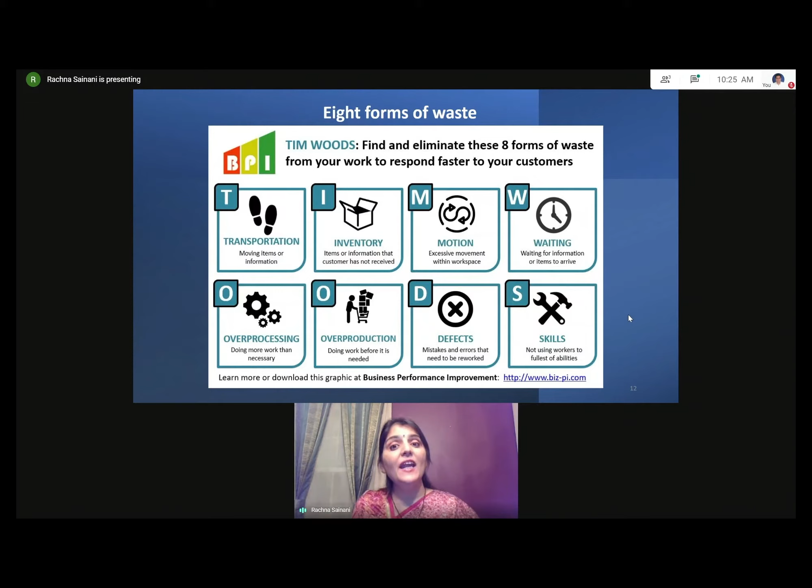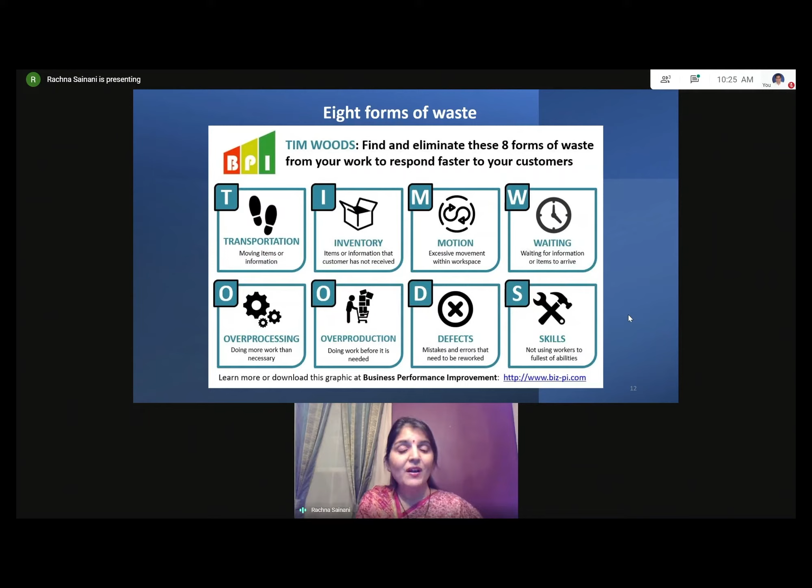And last but not least, not using the workers to their fullest abilities is also considered a form of waste, so skills is the last form of waste. These are the 8 forms of waste which we try to eliminate whenever we try to make a process lean. Lean is a general concept, but it improves efficiency by eliminating waste.

Now we are going to discuss lean in PAT. But before that, I can't help but remember our college routine. It's been almost 20 years since I left Anandpur campus, but I can still say with pride that every single activity we had in college was a value added activity — starting from the morning prayers and exercise to the self reliance sports, every single thing we did during the day added value. That's a great example for lean philosophy.

Now I come to the actual topic of process analytical technology. The way I'd like to approach this is to first share with you what traditionally happens — so consider any pharma company, and I'm saying pharma because that's the most common form of chemical.

There are many chemical manufacturing processes, but the most common form is pharma, which everybody is aware of because it goes into pharmaceuticals.

So the way it happens is there are certain operations mentioned on the slide. As you get the raw material and go through different steps of synthesis, extraction, and distillation, at every step the product needs to be checked for quality. The way it is checked is we sample it and send it to the QC lab, the quality control lab, which tests it. If the test passes and it meets the specification, the product is used for the next step, or if it's the final product, it is packaged and shipped out.

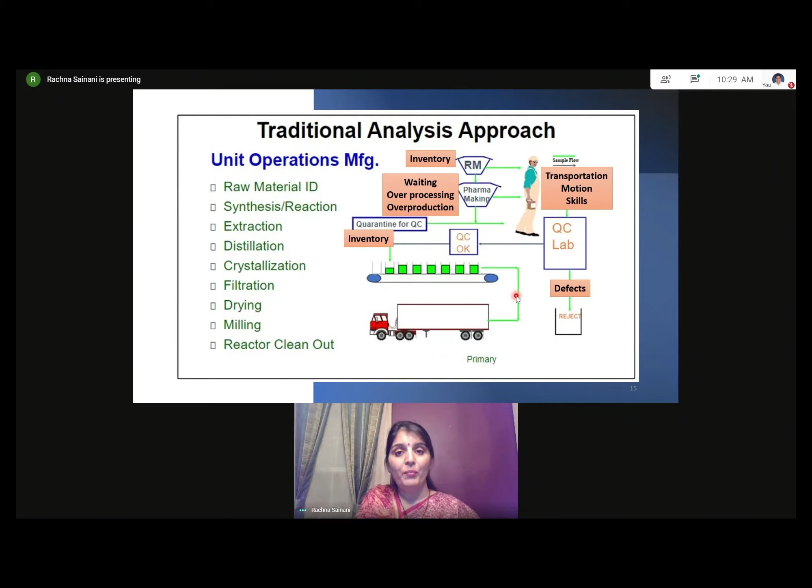So what does PAT do? PAT, which is process analytical technology, suggests that we test the material right there. As we go through all these different steps, we have the analytical instrument attached right there, and we get real time data. That way we are able to take care of all of those 8 forms of waste. That's how PAT is considered a very lean approach to pharma manufacturing.

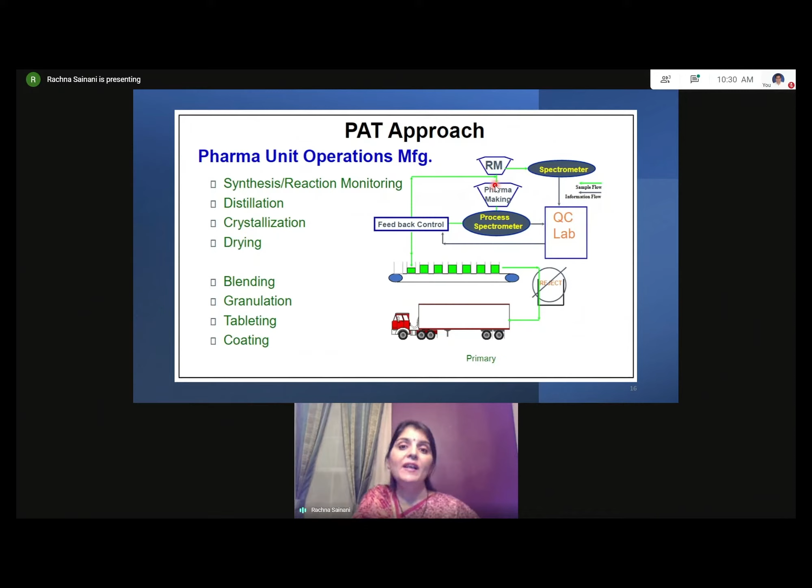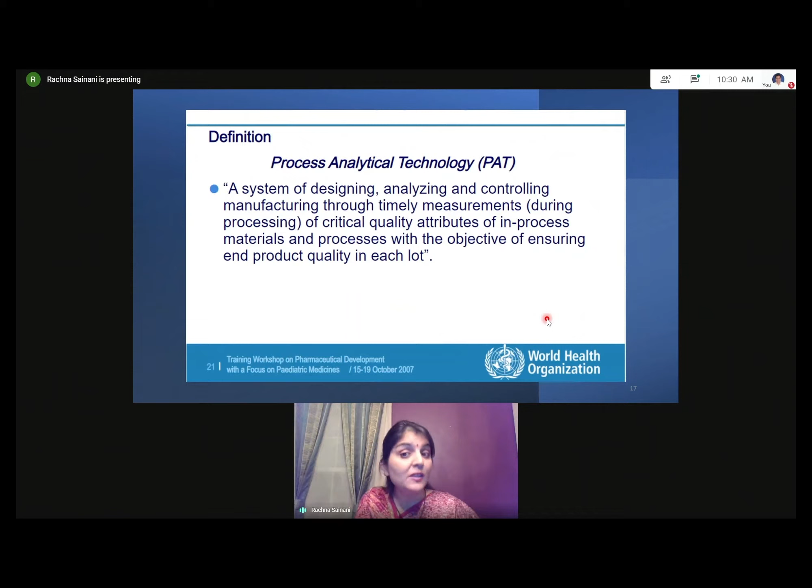This is a fancy definition of PAT, and I'm not going to read it. But one point I want to bring across is that other than removing the 8 forms of waste, as you do process analytical technology, you are building quality into the process because you're watching your process the whole time. So you are building quality in each lot through timely measurements instead of measuring it after the fact. That is the beauty of PAT, or process analytical technology.

To explain further, the conventional product-oriented analysis happens at a snapshot. If you think about a process, a compound which uses three steps to make it - after every step you would sample it and test it. So you're basically taking snapshots of the process and seeing what the material looks like. While in PAT, it's recommended that you test it the whole time as the process is happening, as shown by these arrows. So you're testing it the whole time.

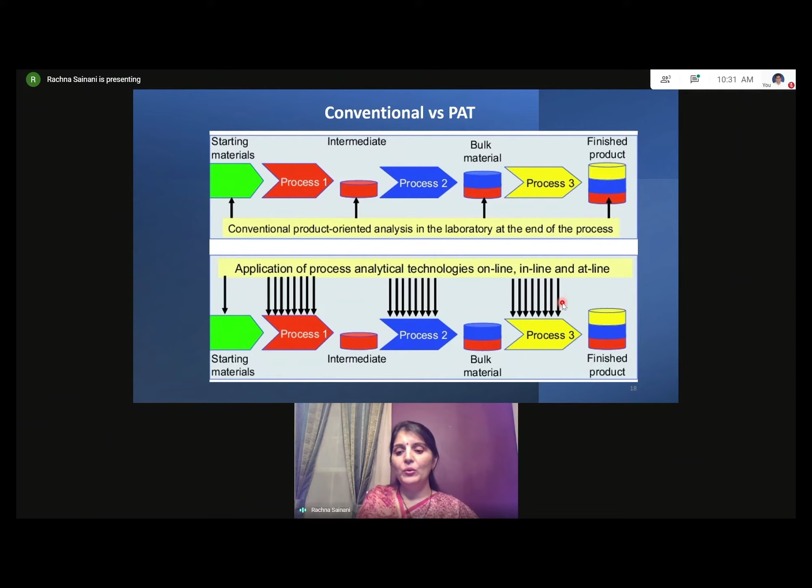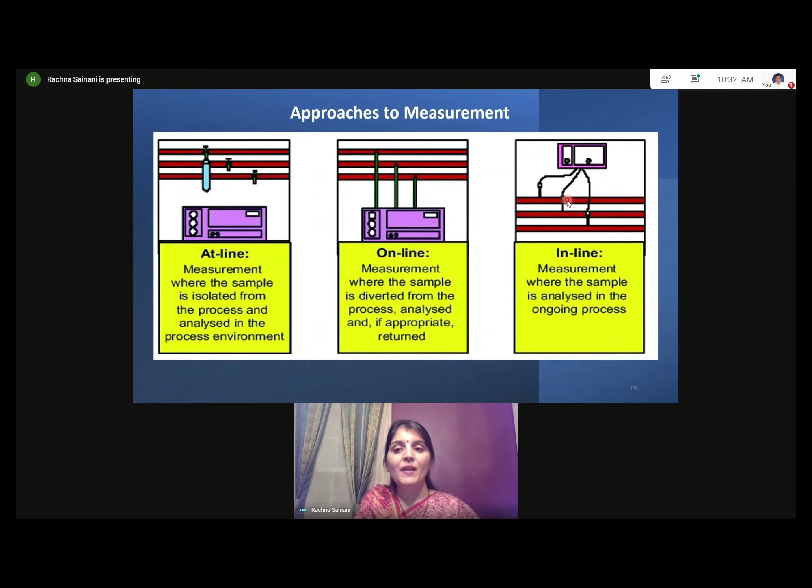And how do we test it? There are three different approaches to the measurement. We can do it at-line, which means you isolate the sample from the process and then analyze it in the process environment. The other option is to do it online, where you divert the sample from the process, analyze it, and return it back to the line if appropriate. Or the third way, which is the most efficient, is inline analysis, where you are analyzing the sample in the ongoing process - this could be more like a probe or a sensor in your reaction vessel or reaction line, where you're constantly testing the sample. So there are these three different approaches by which the analytical measurement is made.

So the one thing where PAT really stands out is that in traditional analysis, the process is actually a black box, because we take samples at certain points and test them. So we know that, okay, after the first step, this is what the product looked like.

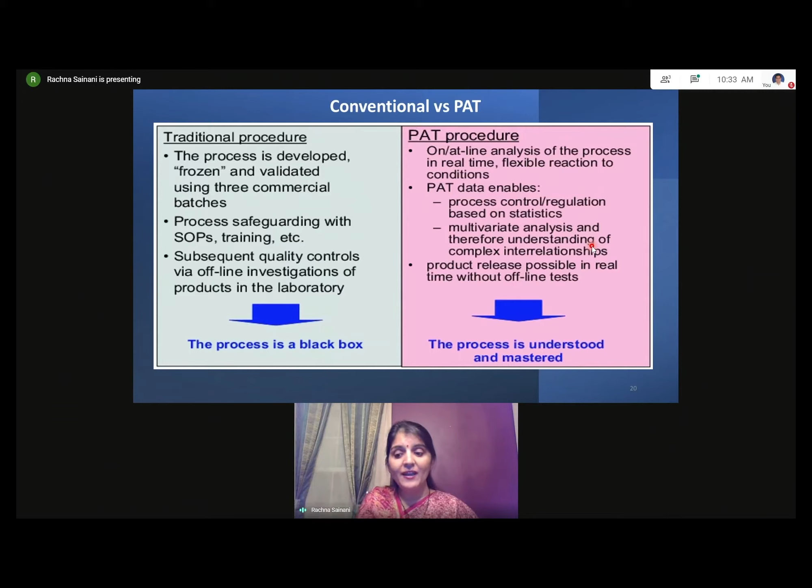But what was happening during that step is not known, right? So that's why the process is a black box for us. Whereas if you use PAT, the process is understood and mastered, because you have the complete data of what the process looked like at every single step. And that's why PAT is highly encouraged as a regulatory approach.

So now, what comes to your mind if you are trying to do inline analysis versus offline analysis, what's the most critical thing? The one most critical thing is the choice of sampling points, right?

Where do you sample? Here I have some examples. Whenever any chemical compounds are made, these are some of the common equipment which get used when making the process. So you have a reactor in which you do the reaction. Then you might have a place where you blend the chemicals, like a powder blender. You have a place where you dry the chemicals, and then if you're formulating it into tablets, there is another equipment we use. So these are some of the basic equipment. There are many more fancy equipments out there, but these are some of the basic ones.

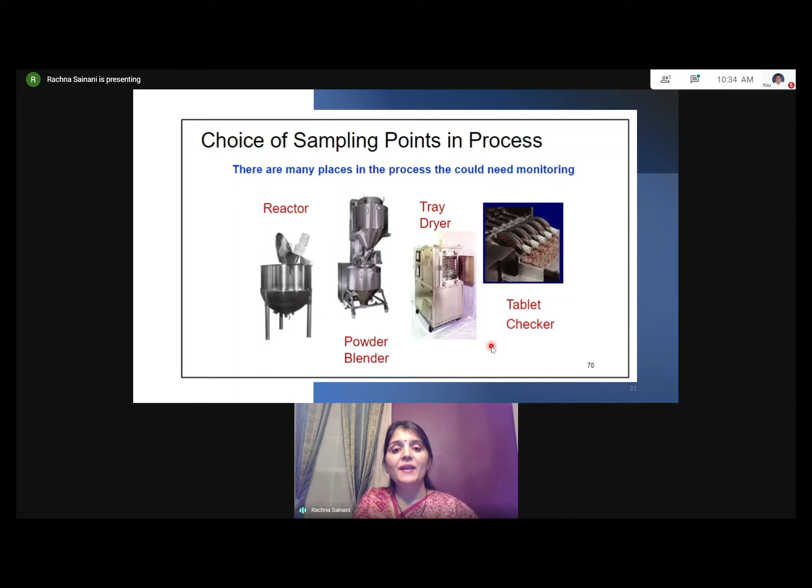One thing to remember is that it's very critical to choose a proper sampling interface. Here, in a nutshell, I have given some examples of sampling interfaces which can be used. The most preferred one is an insertion probe, which you can either put directly in the reactor sampling system, or sometimes it's even inserted in the drain valve. So that's the inline analysis, where you're directly inserting the probe in the reactor vessel.

The other option is a fast loop. So you have a loop coming out of your equipment, and that's where you insert your analytical tool. This is a good way to do it, but sometimes you have reactions running at high pressure or high temperature, and then it's not physically possible to have an analytical probe in the fast loop, in which case we divert the sample to a slower loop. This loop will be at more like room temperature, normal pressure, and then you're able to insert your probe or analytical tool right here for the analysis.

One critical thing to remember is that failure of the sampling interface is responsible for most of the problems in process analytical applications. So if you ever take a route where you're trying to use PAT for any of your research, or developing any process, make sure you spend enough time looking at the sampling interface and trying to use a proper one, and then you will have successful data collection.

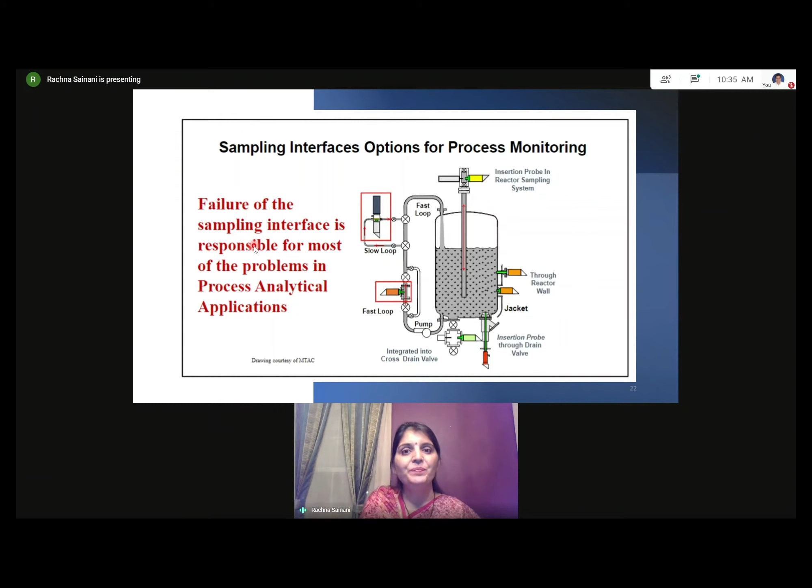So on this slide, I'm trying to talk about some common PAT tools. As students, I'm sure you are learning all different analytical techniques. As you go forward, you'll learn many more. I'm not going to discuss any of these techniques in detail, but I did want to drive the point home that as you have different steps in the process, the needs of analysis might change.

For example, when you're doing a reaction, your focus might be on completion of the reaction, what the impurities look like, what the kinetics of the reaction is, and what the solvent composition is. All of those analyses have some typical techniques mentioned here which are very useful to understand the reaction completion and impurity profile.

Now, as you're working up a reaction, the yield becomes more important. The impurity still stays important. In that case, you could use techniques like chromatography, MIR, NIR.

Now, once you have worked up your reaction and you're trying to crystallize it, you're trying to isolate your solid in form of crystals. At that point, the particle distribution, shape or form, or supersaturation become more important. You try to watch those. And at that point, turbidity, FBRM, PVM, Raman, MIR are the common techniques.

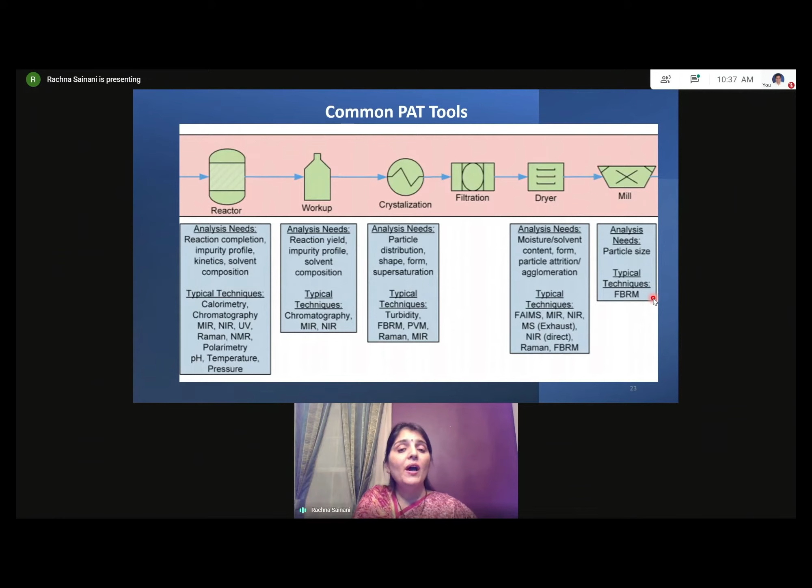Here I have mentioned some of the more often used techniques in PAT. There are techniques like mid infrared, which are very versatile and very easy to interpret. So it seems to be the most popular technique used in PAT.

We have Raman, which is limited in sensitivity, but still seems to be a popular tool, especially because it can work with solids and slurries.

We have NIR, which is easy to deploy, but it does need some expertise. So it's a little bit more tricky to interpret. You need some experience with the technique to use it successfully.

And then UV. As we all know, small molecules, especially drug molecules, typically have a chromophore, so in that case UV can be a great tool. You can use UV analysis, inline analysis, and understand your process better.

So when I talk about all these techniques, some of you might be thinking, oh, so that's all PAT is about—instead of using analytical equipment in a separate lab, I'm using it right there. Is that what it's all about? Not really. There is more to it.

One thing we are not considering here is that when you analyze a sample in the lab, you are actually cleaning up the sample. You're preparing it, cleaning it up, and then analyzing it, and you have a lot of knowledge about the sample. Whereas when you do PAT, there are so many variables in place, plus you're not cleaning the sample—you're analyzing it as it is.

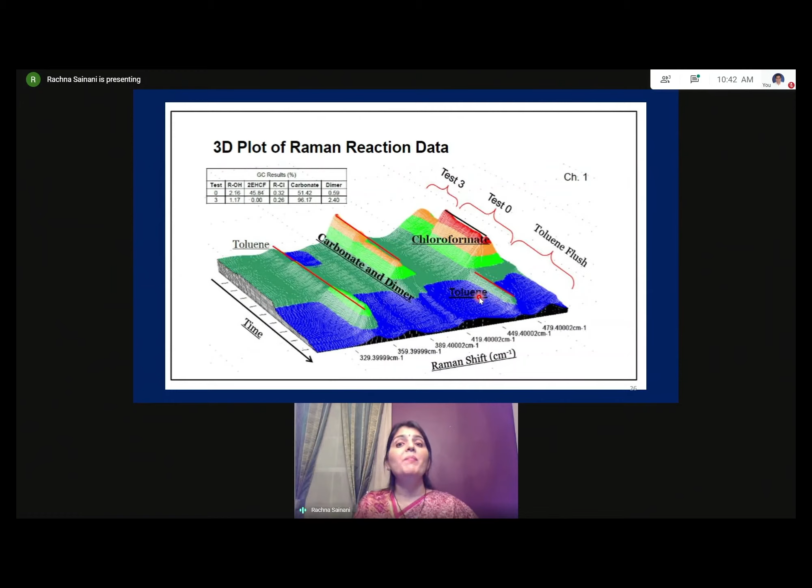Not only that, as you use PAT, it's also giving you a lot of mechanistic insight about what could be the mechanism of this reaction, and that's where PAT again becomes a very knowledgeable tool. So I hope with all this explanation I'm able to drive the point home.

When you do PAT, you not only collect your data, but you save the data at every single point of the process. Of course, you run many batches, you have data from many batches, and the multivariate analysis can relate the best batch data to the current batch data, giving us a full perspective of how robust our process is.

At the same time, if something goes wrong in the process, we can have a feedback control where we're able to correct the process as it's happening, instead of finding it out after the fact. So PAT has many different aspects to it—it helps us understand the relevant factors in the reaction, and it helps us with process analysis.

It uses multivariate analysis to get a full picture of the process and also mechanistic insight. At the same time, it can help us for a better process control where we are able to control our reaction from going in an undesirable direction, where we may not want it to go.

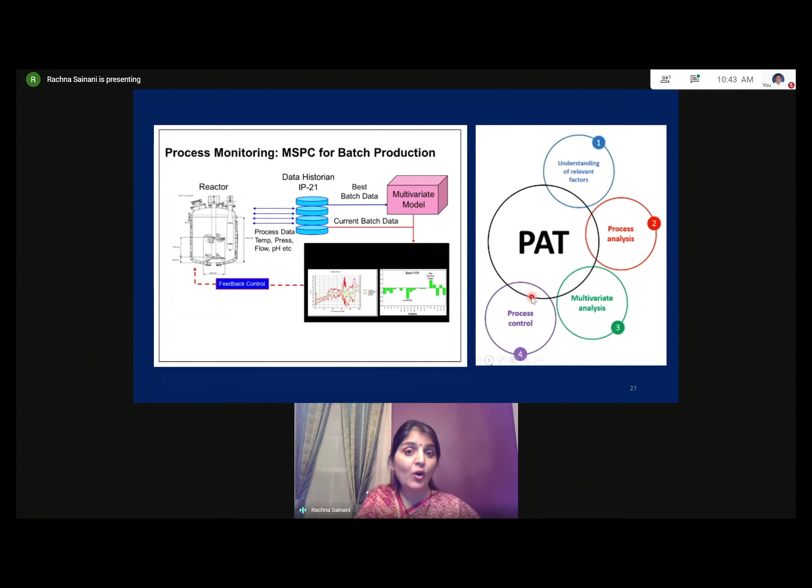So how do we implement PAT? There are two paths for implementing it. Either you can choose to implement it right from the R&D stage, whenever we are doing development on a molecule and deciding how to make it, we can use PAT as a tool, or we can use it directly in manufacturing. There are definitely different opportunities whether we use it in development or manufacturing.

Some of the important things to think about is the overall purpose of PAT. If we do it in development, we should do it more for understanding the process. Whereas if we do it in manufacturing, we should do it to analyze the trend and also control your process.

If you're using it in development, it's highly recommended that you use multi-component analyzers because you're not familiar with the process, so you might want to analyze everything. You might want to check the pH, the pressure of the reaction, the UV data, IR data, and everything you can possibly check to understand that process better.

But if you're doing it in manufacturing, chances are that you already understand your process, in which case you can use more targeted analyzers. For example, if you know that your reaction does not really change in pressure, but the pH is a critical criteria, you can have an inline pH meter, and that should be enough for your PAT.

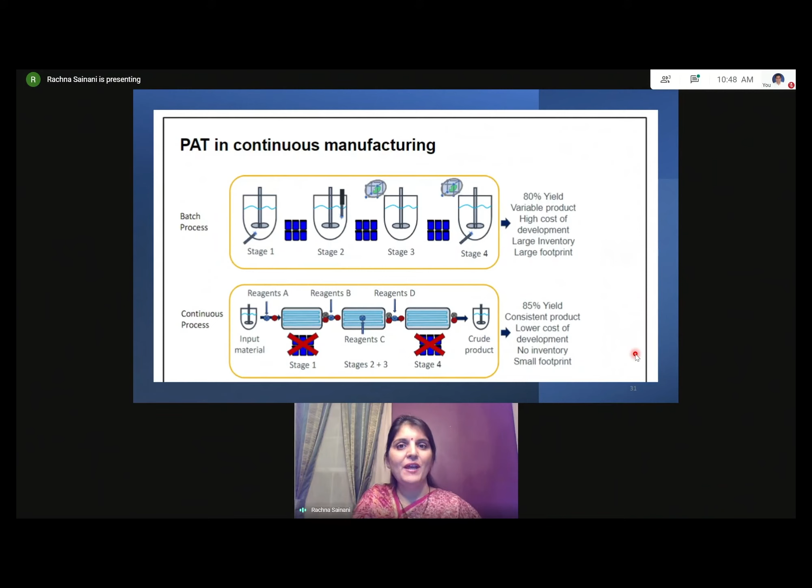So with all this information, I hope I'm able to drive the benefits home. PAT helps us with faster analysis time, and it is definitely important for a faster result time.

As I told you, we are cutting off a lot of extra things which we don't need to do if we have inline analysis. It also helps with faster decision making, and especially with the current pandemic situation, having faster decision making and faster results is obviously very welcome. Last but not least, it also helps with a greener analysis, because you're using less time, less resources, maybe less solvents to do the analysis.

Some of the other additional benefits of PAT are sustainability. Because you are reducing the energy requirement and doing real time in-process analysis, you're saving a lot of time on analysis. You're using less chemicals to extract, to filter, to wash the product. You're definitely using less chemicals there, and at the same time you're making a process safer, because now you don't have to sample the process at every step. You're saving a lot of time and making your process very safe. You're not exposing your operators to those chemicals. That's another big advantage of PAT.